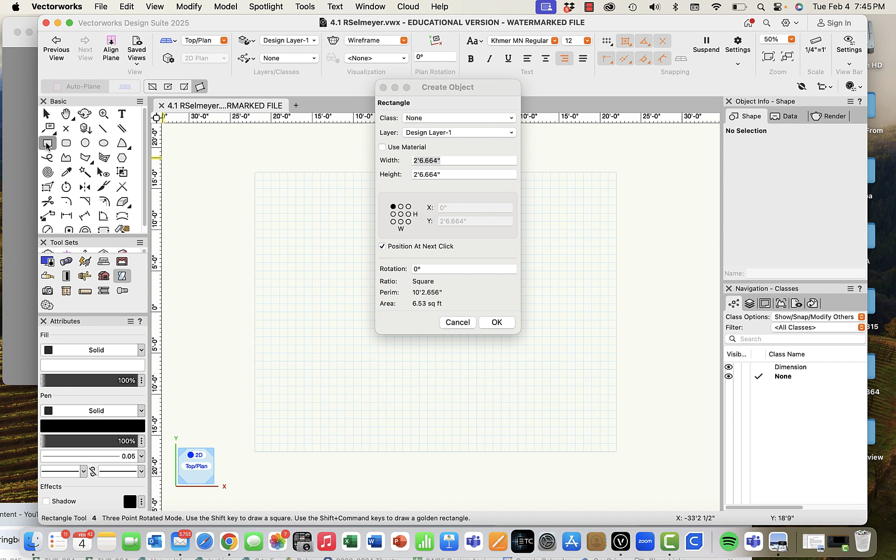So I'm going to go ahead and save 4.1. And then we're going to start. We are in plan view, so we're looking down on a two-dimensional view, and we're going to start by just drawing a two-dimensional rectangle. In the book, they call for 8 feet, 0 by 4 feet. We're going to center place it right onto the center of our page.

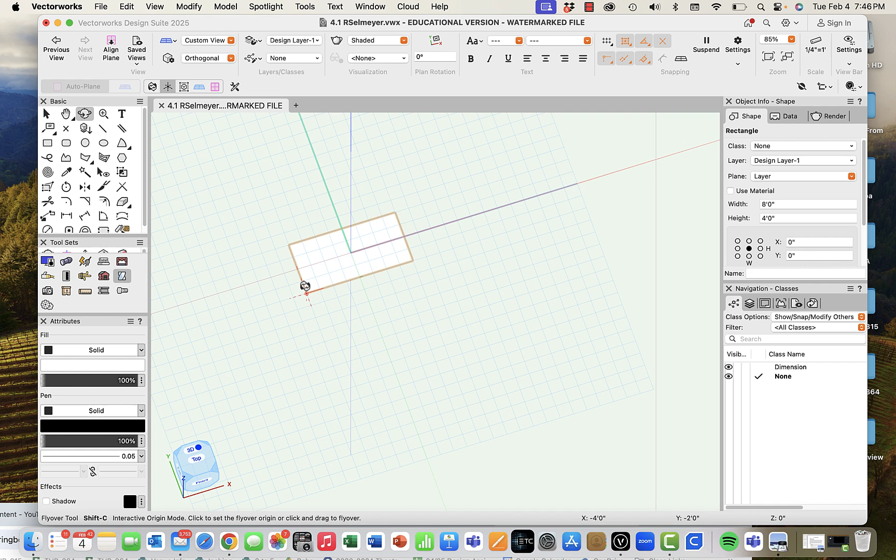Awesome. And then what we need to do for a ramp, so when you draw a square, we are going to just use our flyover tool just to reiterate the fact that we are in a two-dimensional drawing. So there it is, just laying on our page. But when we go to our 2D view, it looks like that. So we're going to extrude it. Extruding is where we're pulling it up. And we're going to extrude it 2 feet. All right, so then when you do your flyover, you can see that you have a cube rather than just a square. And we're going to go to a front view.

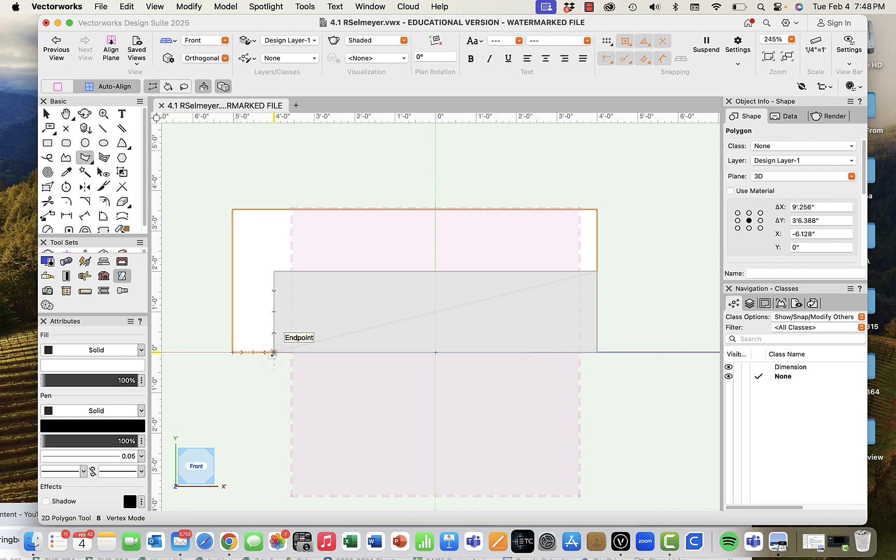And then basically, in order to get that incline or that ramp, the easiest way to do it in Vectorworks, in my opinion, is to go ahead and just subtract solids. So we are going to use the 2D polygon tool. Remember, when we're doing a subtraction, we do want our object to go beyond the object we want to leave. So I drew this polygon, and when you fly over, you can see again that this is two-dimensional. It's not a 3D object. So we need to turn it into a 3D object.

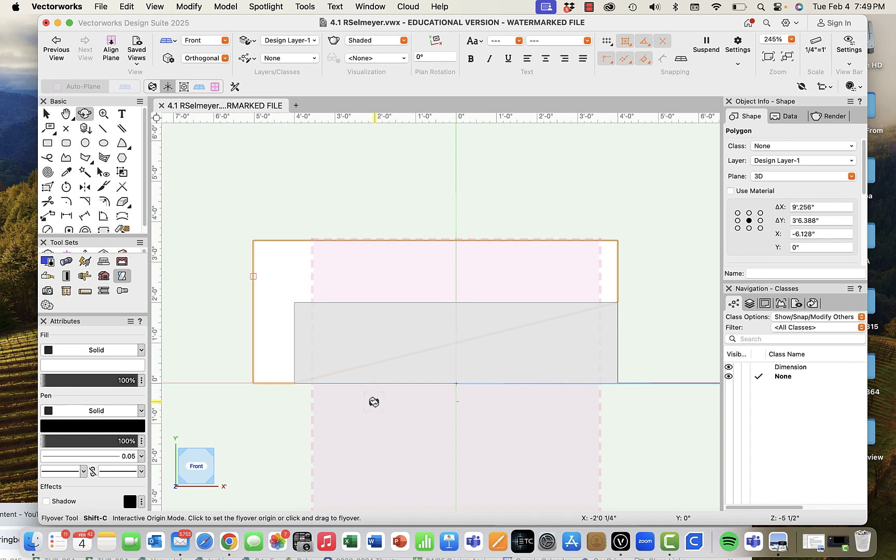I want to make sure that I am on a straight front view. Well, there you have it. I was on a back view. I'm going to go ahead and extrude that beyond the 4 feet width of my ramp. So what I can do is I can just do 6 feet. And then when I go back to my top view, you can see that the object I drew is larger, but it's not quite lined up. So I do need to move it on that y-axis at least 2 feet.

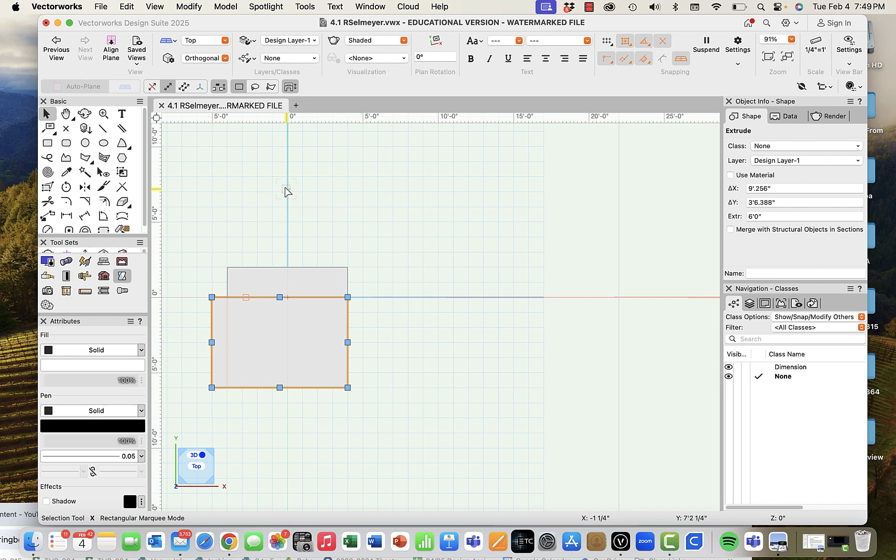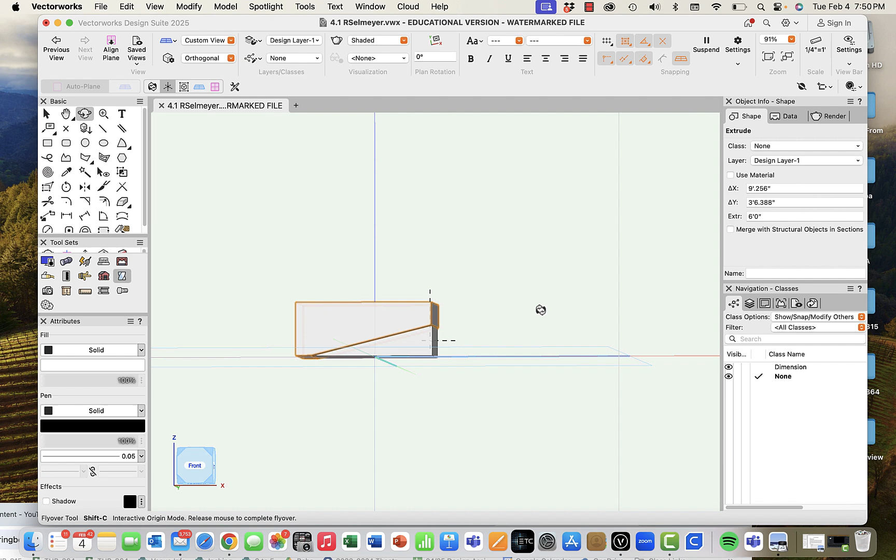So using my Command M, I'm going to move it. I'm going to go ahead and move it 3 feet. It's positive on that y. Awesome. So it's covering up the entirety of the ramp. If you fly over, you can kind of see that ramp is underneath. And then all you have to do is shift, select both objects, and subtract solids. You can subtract solids by going to Model, and then Subtract Solids. Again, whatever's red is what's going to stay. The other one will go away.

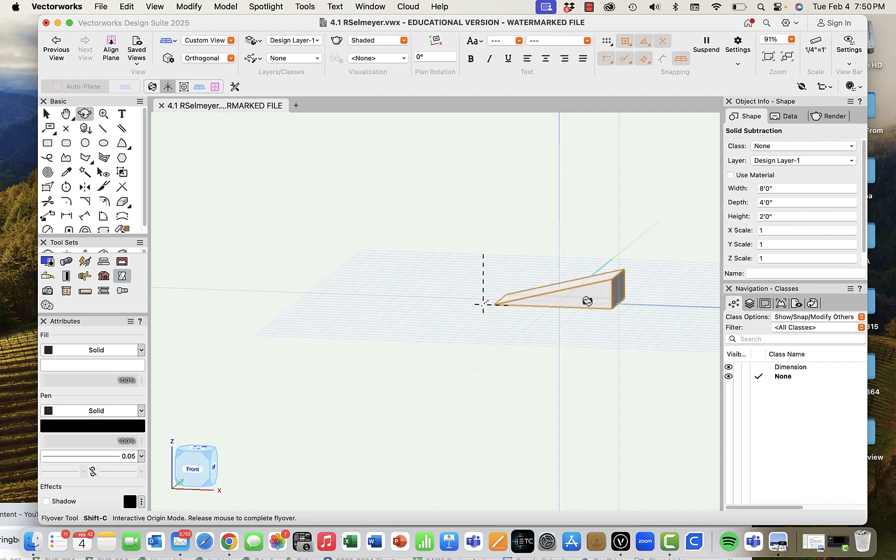If you want to retain this object, you can simply click this box, but we don't want to retain it right now. So we are going to press OK. And then when you fly over, you have a three-dimensional ramp. So we're going to go back to a top view, and you will be turning this document in as a Vectorworks file in 3D. So for a 3D file, we don't need to treat it like a 2D drafting. This is computer-aided modeling, essentially. So we're just going to pull this up here to the top left quadrant.

And then I want to draw the tent object that is on page 89. So what I'd like to do is create a situation where I don't have this ramp in the way. So I'm going to go up to Tools, and I'm going to go to Organization. I could create its own design layer called ramp, or I can do it as a class and create a class for each individual object, which is what I typically do. So I am going to go ahead and do that. I'm just going to call it ramp.

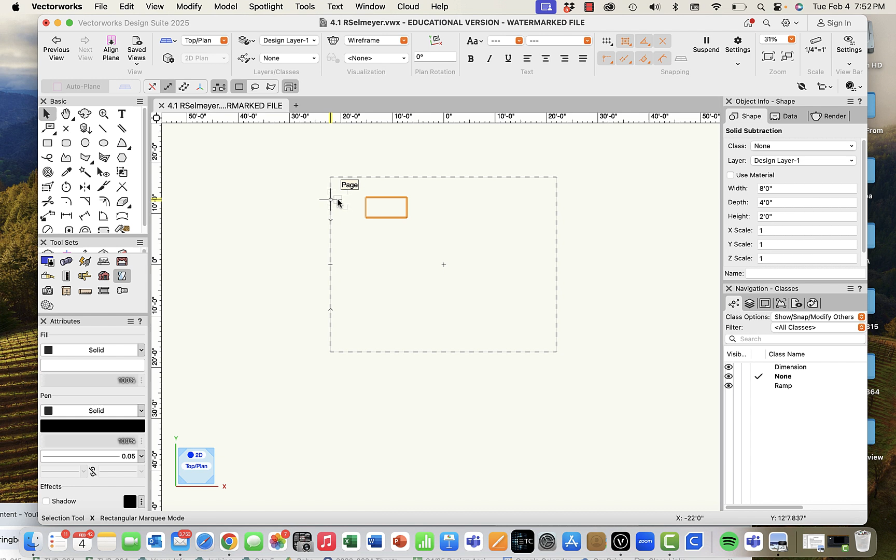And then when you're in classes, down on the bottom right hand of your screen in the navigation, you can see that the check mark is in none. So we've just been building right here in a class called none. But what I'd like to do is get this object and move it to the ramp class.

The way that I do that is up here in the top right of your drawing, you can see it is object information. This tells us everything we need to know about the object we just built. So its width is 8 feet, its depth is 4 feet, and it's 2 feet tall. So what we see here is that in the layer that it is in, design layer 1, which is where we start, the class that it's in is none, because that is the automatic class that it goes to.

So we're just going to click this, and we are going to place it in the ramp class. So nothing really changed, because when you go over to navigation, you can see that the class options is show, snap, modify others. So we're going to see everything, which is fine. I just tend to leave it there, because the easier way to turn separate objects on and off so you can see them or not is just right here in the visibility of your navigation.

The left-hand side has the eye, and when that's on, you can see it. The middle column is the X. So we're going to go click that, and that ramp disappeared, but we can just turn it right back on, and it's still there. So we're just hiding it for the moment. And so we're still in the none class, which is totally fine. To draw in that, you have to have the check mark right next to it.

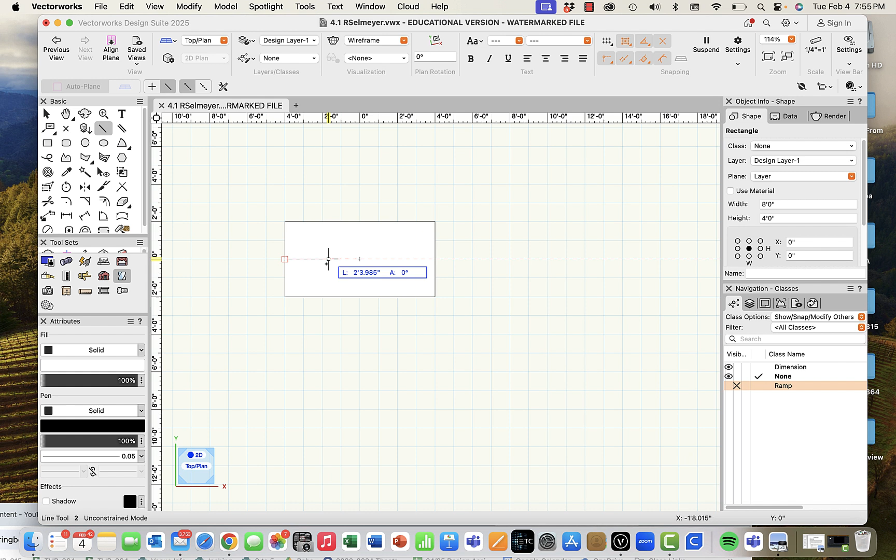So we are going to do some reference points just like the book says to do. So using the line tool, I'm going to go ahead and find the center left of my object, draw right through center. You can see it's giving us the red reference line. We can go beyond the edge. That's okay. Then I'm going to just come back, find the diagonal line on the blue handle, and I'm going to pull it out a little bit further.

The next thing they wanted us to do is to do some reference lines right at 2 feet, which is a quarter of the way. 2 ways that we can do that. I can just come over to the top left edge, draw a line right along that left line, and then I can use Command M to move my line 2 feet. Oop.

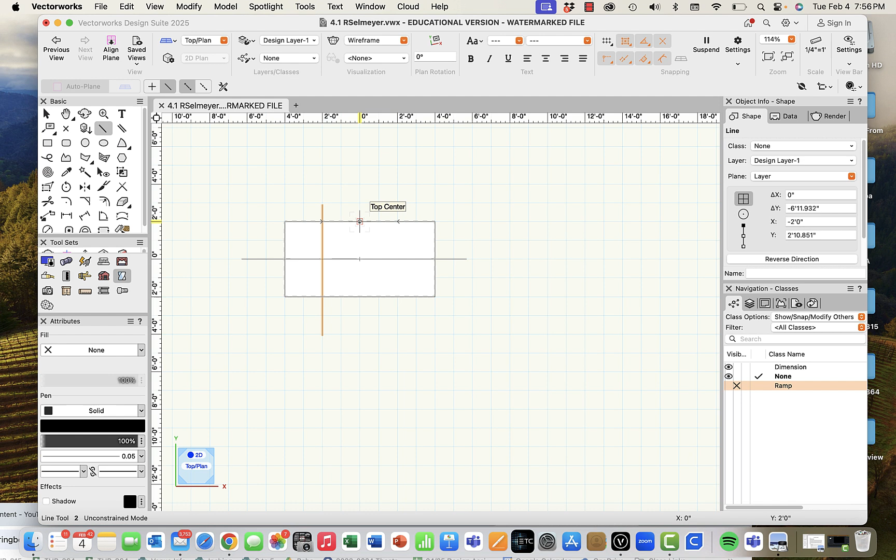Want to extend it beyond a little bit. The other way I could just do that is to simply recognize that this does allow you to automatically find the top center, and then also the quarter of that object. So using that, I know that it's 2 feet over because it goes basically 2, 4, 6, 8. So those are the points that we need.

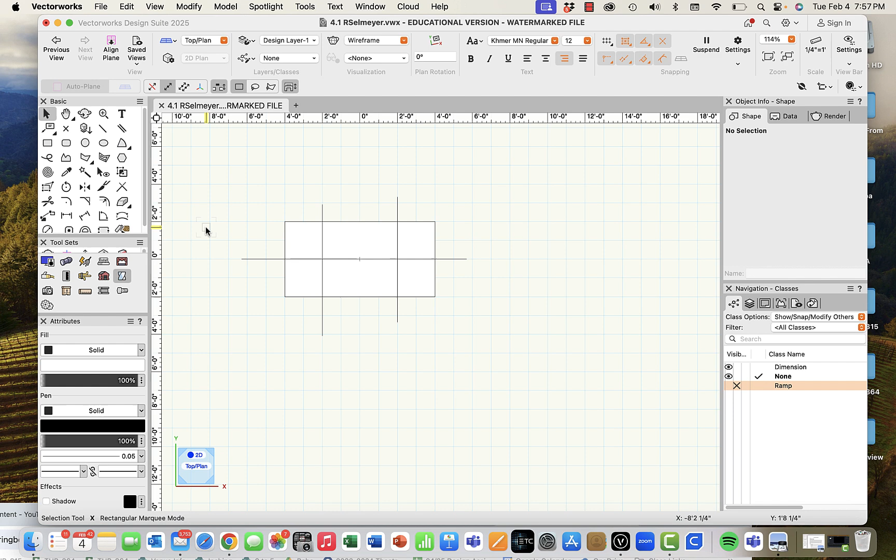The next thing I want to do is some lines coming up off of this line, which is basically the Z. So instead of being in a top view, I'm going to go to a front view. You can't really see those lines, which is fine. But I'm going to double click on my line tool, because we want this line to be 1 foot 6 inches.

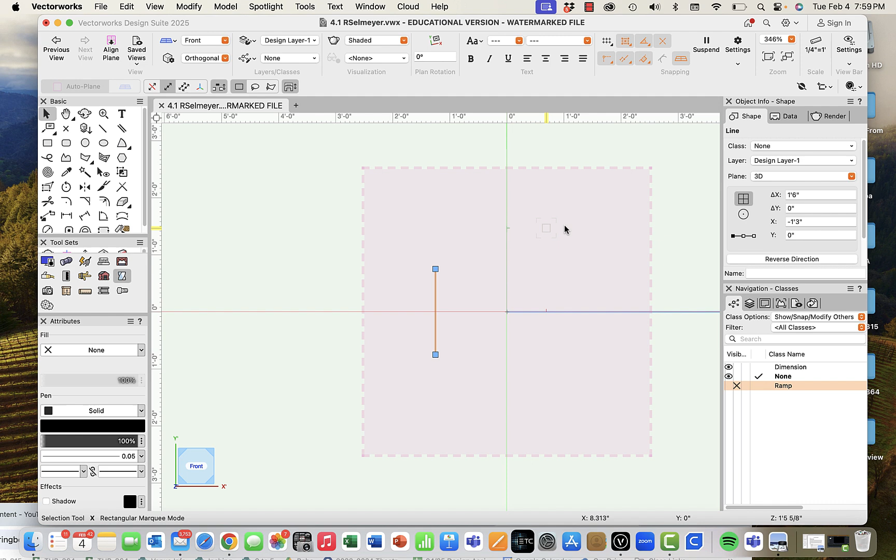And then I'm just going to place it. Oh, it went flat. So what I can do is I can just fly over. There's my line. I'm going to go back to that front view now that I see where it is. I'm going to hit Command L. That rotates it left. I'm going to move it 2 feet 0 inches just to get it above that 0 point. I'm going to fly over, rotate.

And then when you're up above at an angle like this, you can see our reference lines. And we basically want to grab this line by the bottom blue handle and drag it so that it hits the object. It's at the cross point of the 2 lines. And that is essentially what we're looking for there.

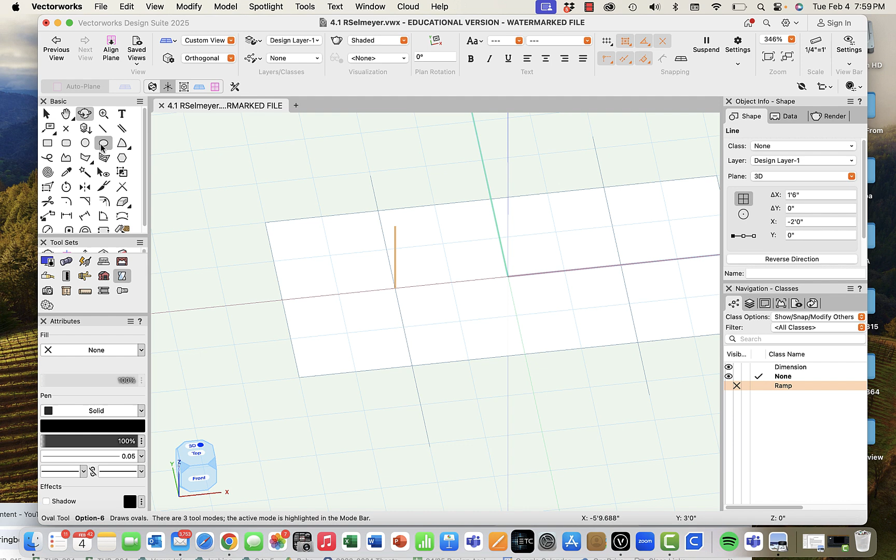Now, my line is already selected and I need to have another line at this crossing. So I'm going to simply go back into a top view, and it is selected even though you can't really see it very well. Oh, now it's not selected.

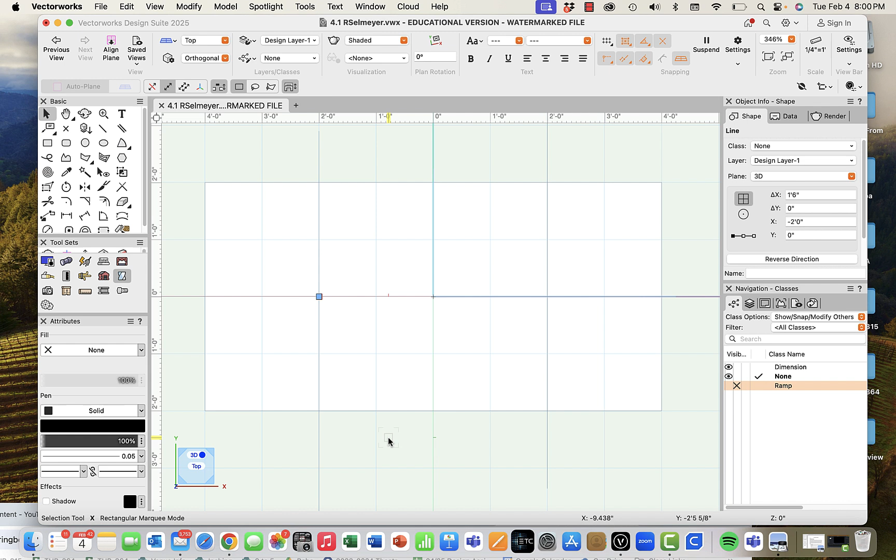Okay, so you can see there's a blue dot, which means it's selected. And then I'm simply going to use my mirror tool, find center, go down vertical, and it should have duplicated over here, which when I fly over, I can see that indeed that worked. I could have also done my mirroring from top view. That would have been a-okay.

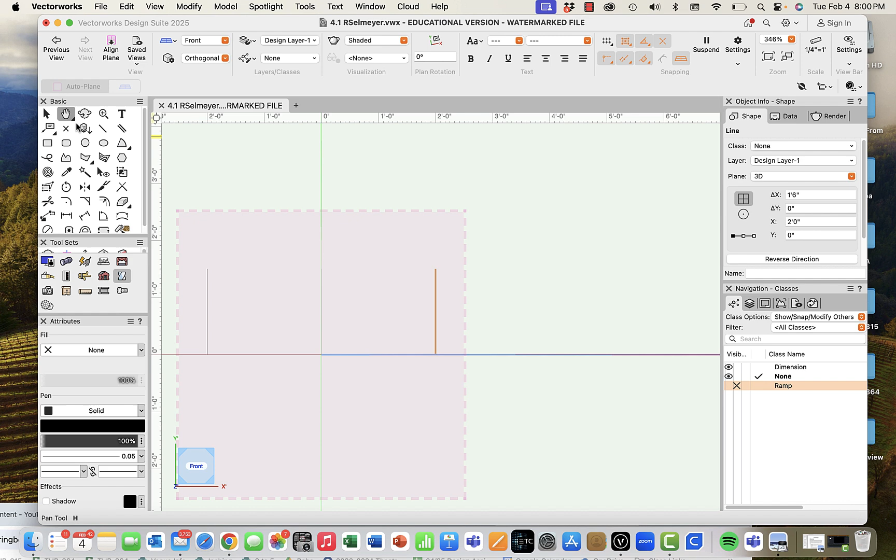Now, there are 2 ways that we really can do this. One way is to create this tent by creating a cube and then subtracting it out. However, we did kind of discover an easier way to do that. So in my tool set over here, you can find this 3D modeling tool. And then I'm going to use the 3D polygon tool.

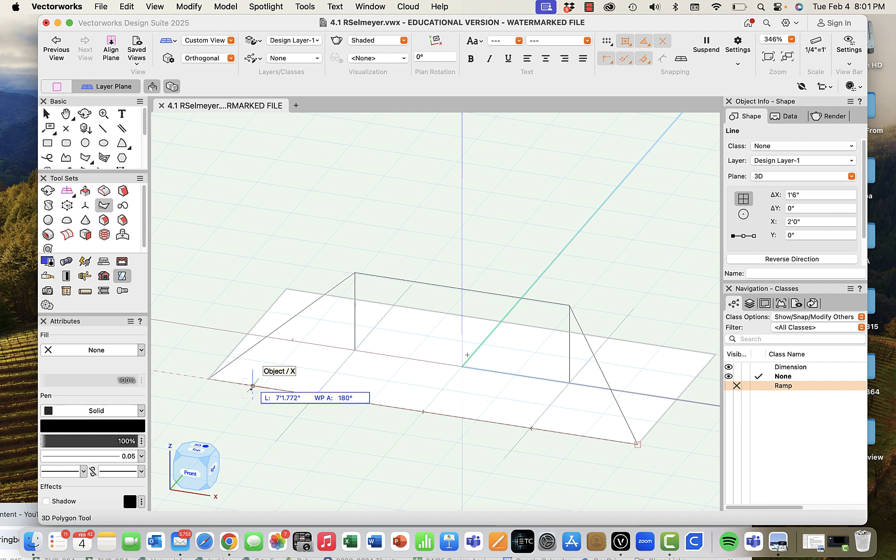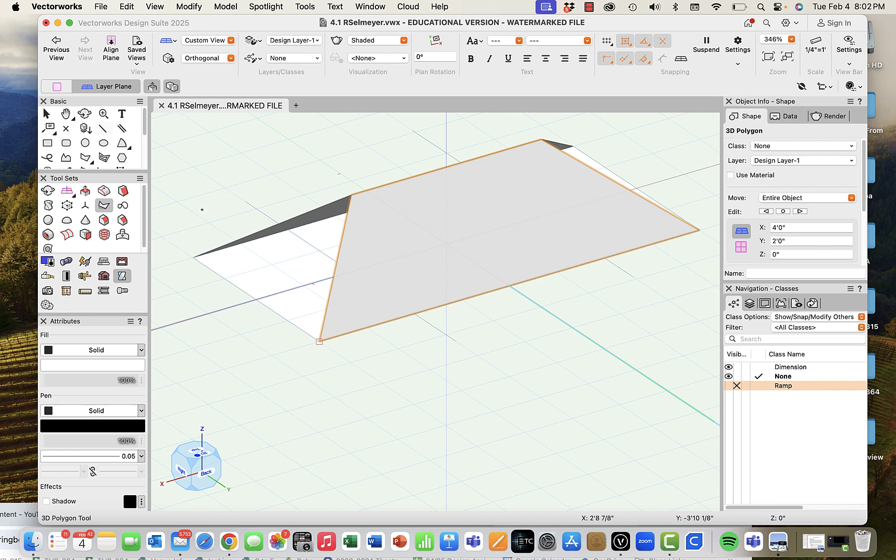I know where all of my points are because of my reference lines. And I can simply click, find my endpoint here, click, and then finish out that polygon. I will do the same thing on the other side. 3D polygon tool. And then we need to fill in these ends.

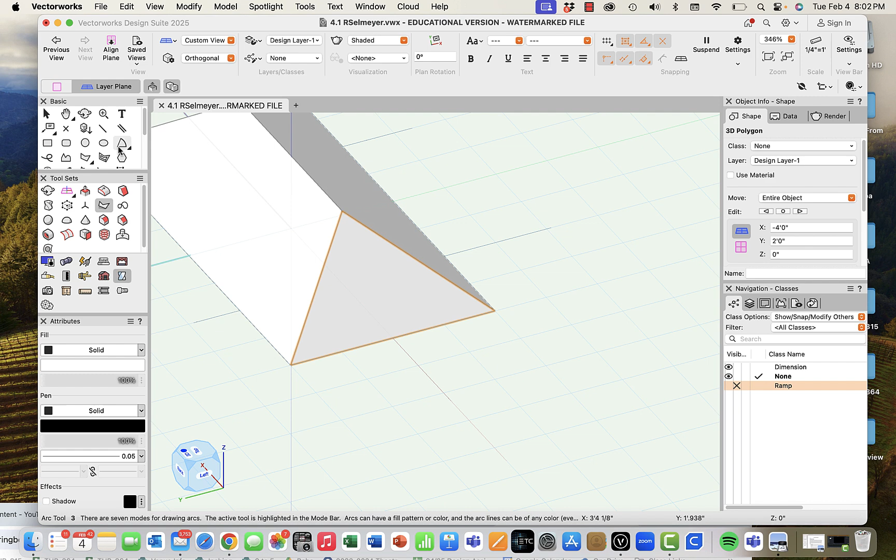All right, so we have magically created this 3D object, which is really spectacular looking. Truth be told, I have not worked with this tool ever before until this week. Abby, who has used SketchUp quite a bit, showed me that tool, and so I'm anxious to try it out and see how it really functions within a 3D model. And so that's going to be something fun to explore. There's always something new with Vectorworks. It's kind of crazy.

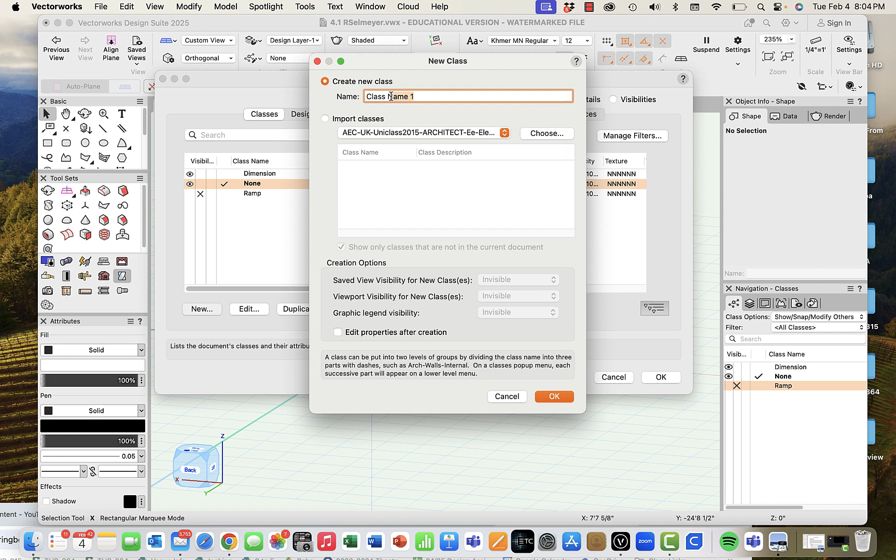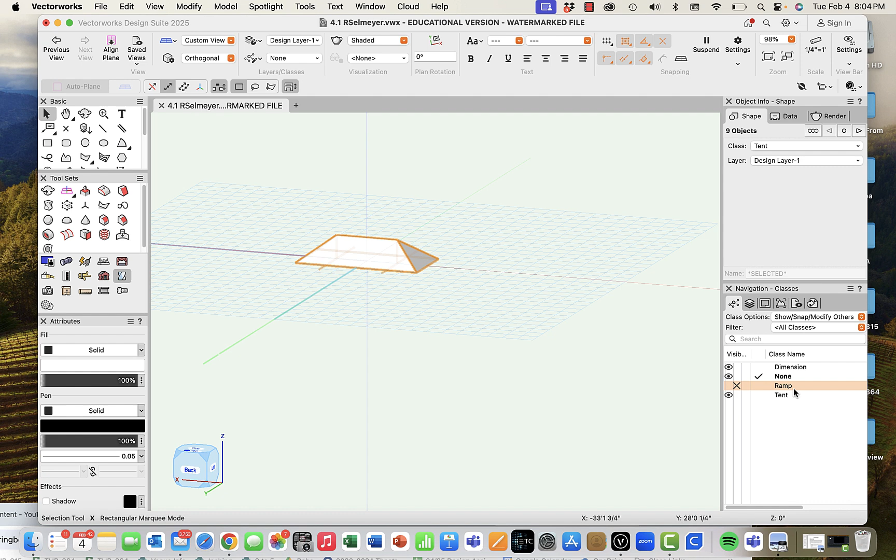So what I want to do now is select this object. And oops, before I do that, we need to make a tent class now. So we're going to go up to Tools, Organization. I'm going to create a new class called Tent. Okay. And then I'm going to select these objects and move them out of the None class into the Tent class. And now I can turn my ramp back on, and it is still here just doing its thing.

And this is all that I need you guys to do for this assignment. So go ahead, and you can turn in your Vectorworks file right onto D2L. All right, see you soon.